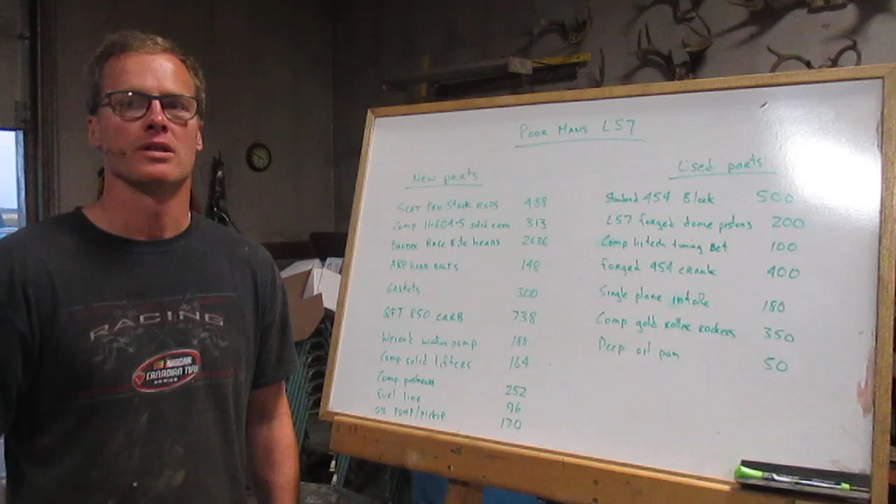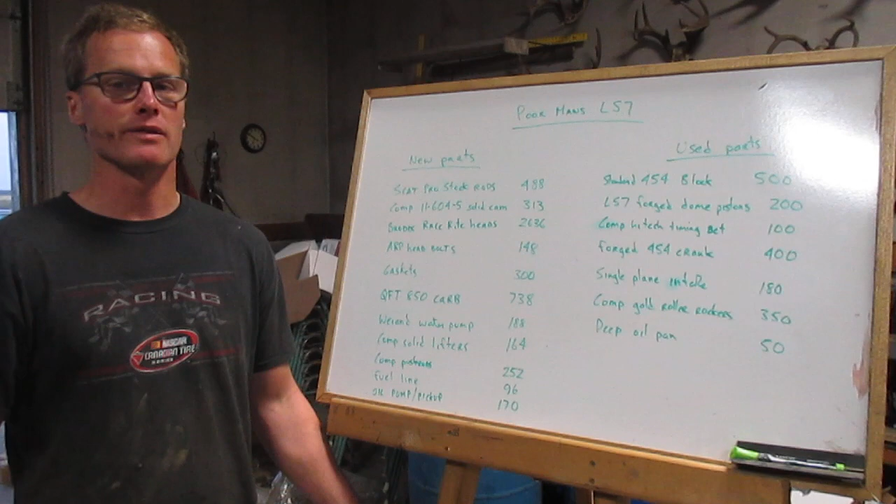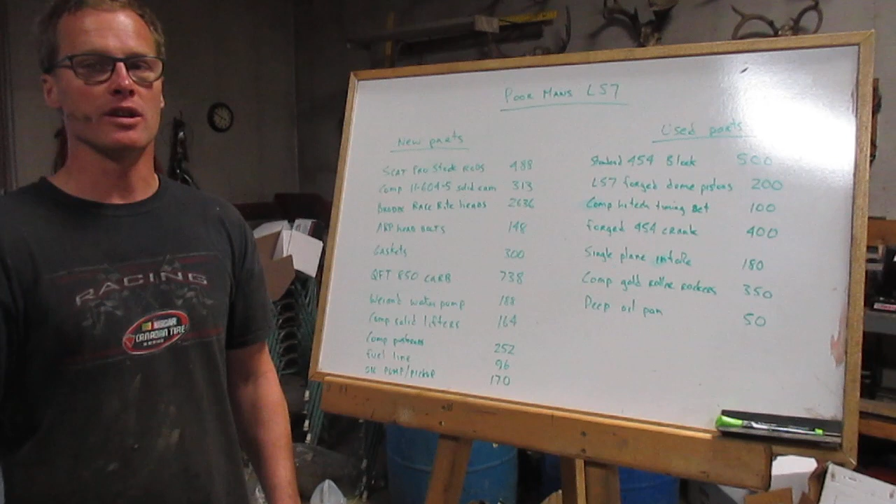Hey, my name is Brian Taylor, and I'm here with a big block Chevy that I've recently put together. This is the fourth in a series of big blocks I've built using a mixture of new and used parts. This one I'm calling the poor man's LS7. I came across a set of LS7 pistons on Kijiji that I couldn't pass up, and I decided to build a motor around them.

Here's a list of what I've got into this motor.

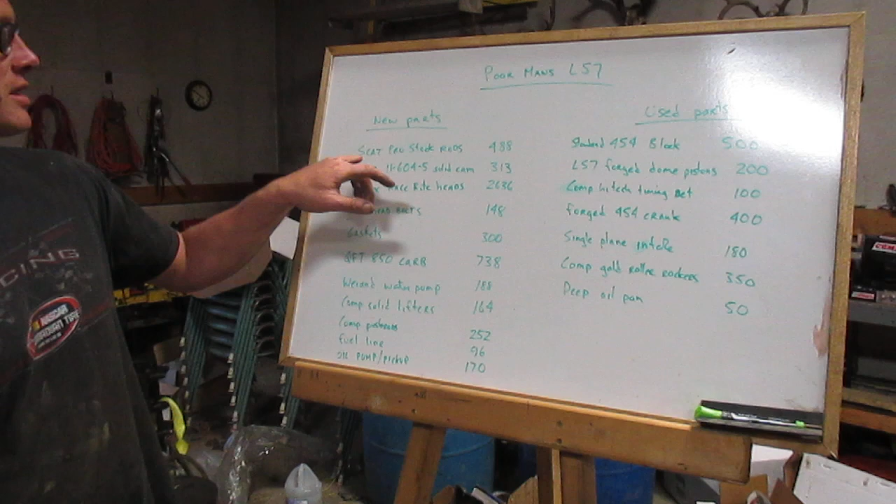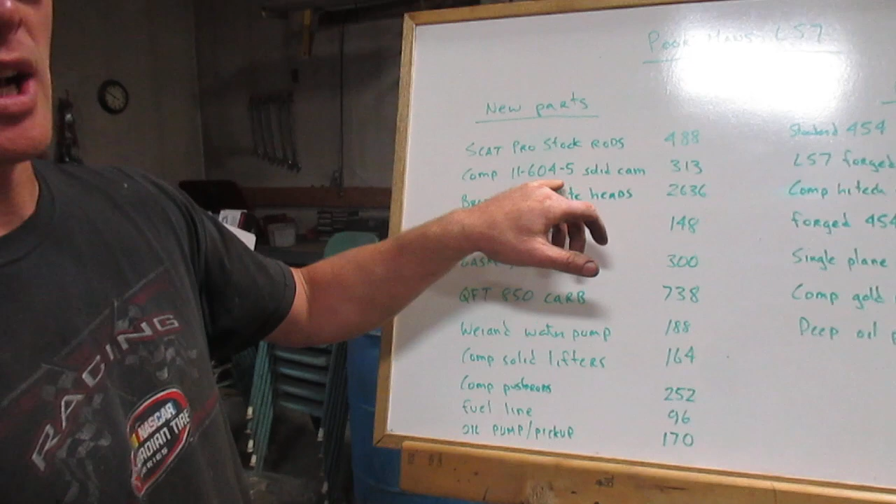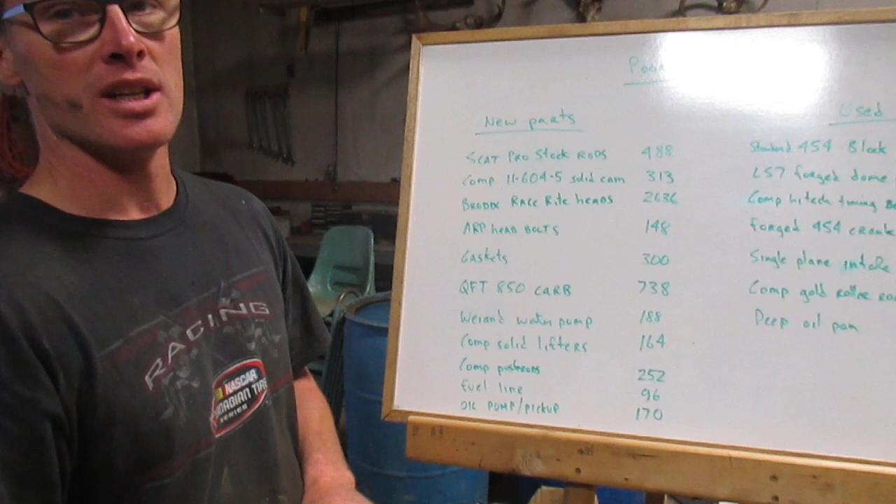For new parts, I put in a new set of Scat Pro Stock rods, fully bushed, a Comp solid lifter cam, 11-604-5, a pretty healthy cam, and a brand new set of Brodix Race Rite rectangle port heads. I originally planned to use iron heads on this build, but once I did the math, this seemed like the way to go.

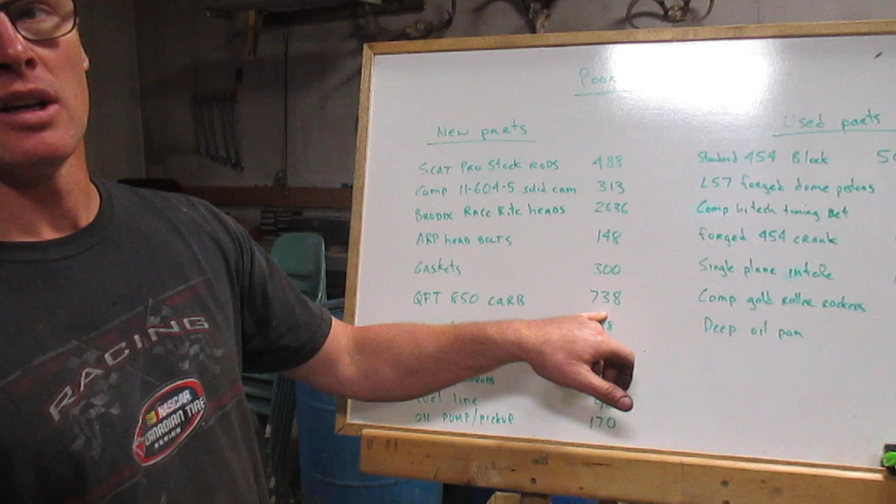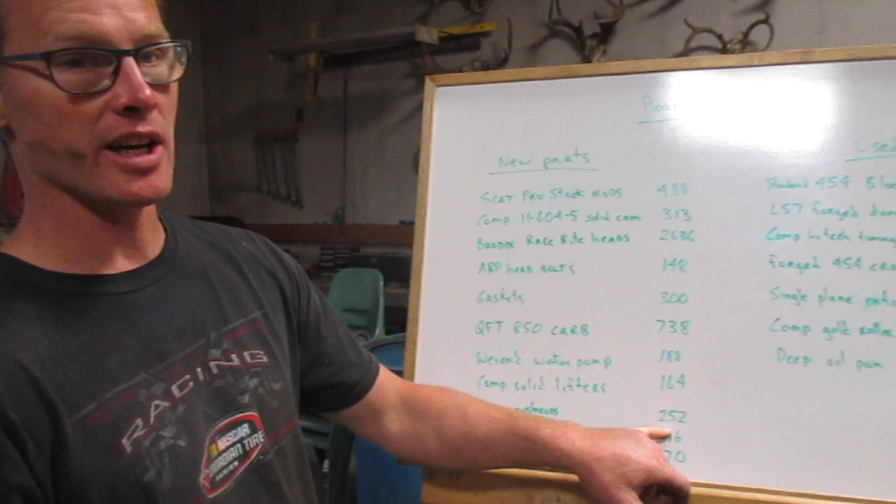Head bolts, gaskets, and a brand new QFT Quick Fuel 850 carb. I hate using junky old carbs on my stuff, so I put a brand new carb on it. Weiand water pump, solid lifters, Comp push rods - I used the high-tech ones that had to be measured to the right length for this build. Braided fuel line, new oil pump and pickup.

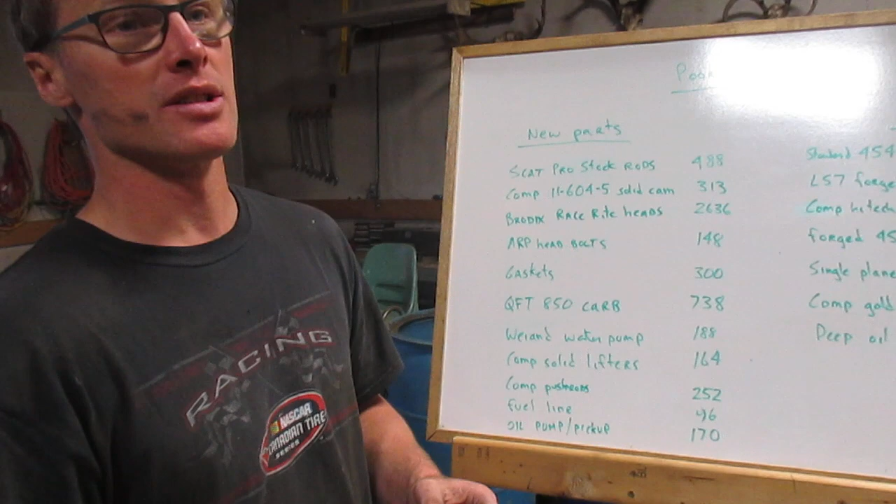There's lots more new parts like oil, spark plugs, carb studs, lots of little odds and ends, alternator bracket. But that's the highlights of it all.

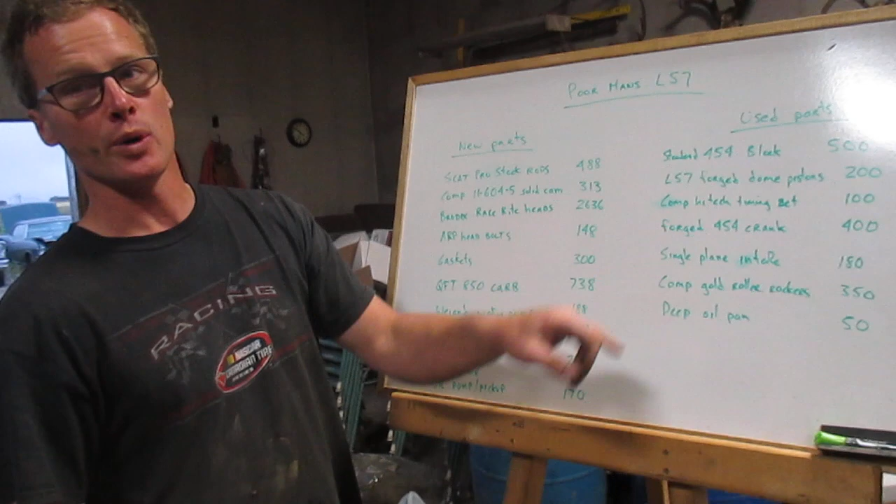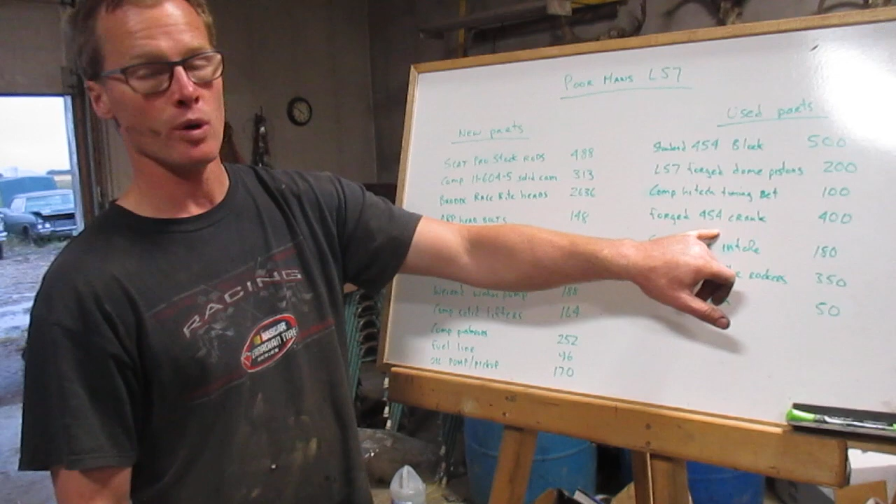For used parts, I found a standard 454 block out of a motorhome that was in just beautiful condition that would work with those standard pistons. There's the pistons - picked them up for 200 bucks. Comp high-tech timing set, that's the one with multiple keyways and the Torrington bearing on the back. Forged 454 crank - I've torn apart a lot of 454s, and this is the first forged 454 crank I've ever come across. So they exist.

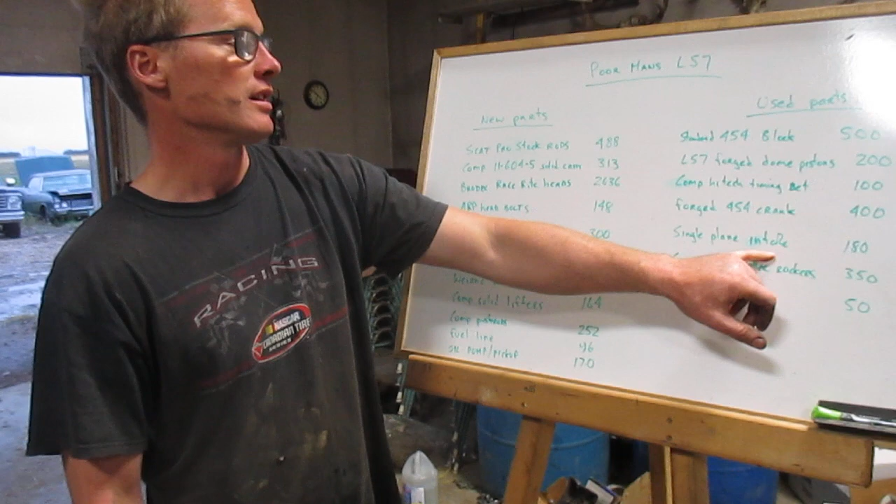Single plane intake, some kind of Chinese one - it looks good, works good. Comp gold roller rockers, those are the 1.7 ratio. Deep oil pan - I used the biggest oil pan I could find on this thing.

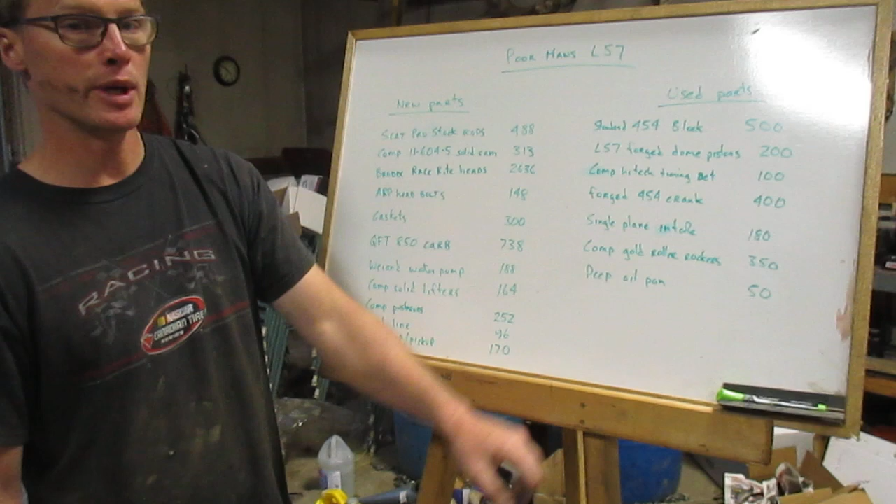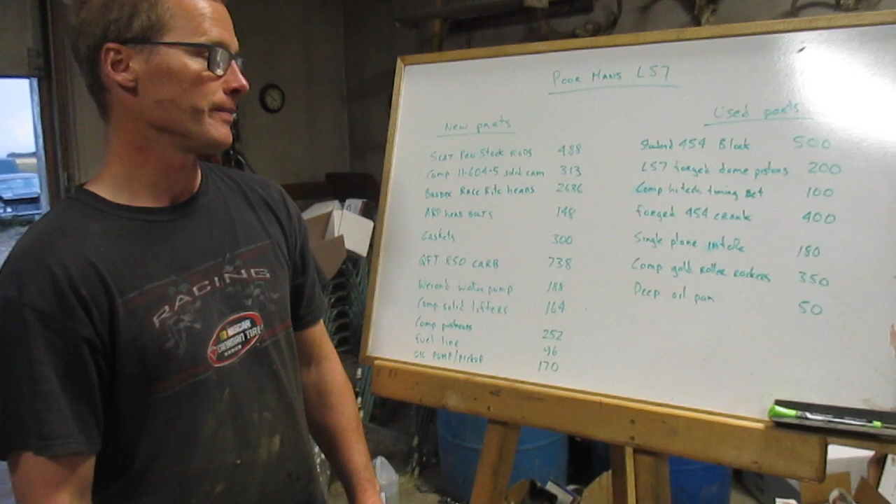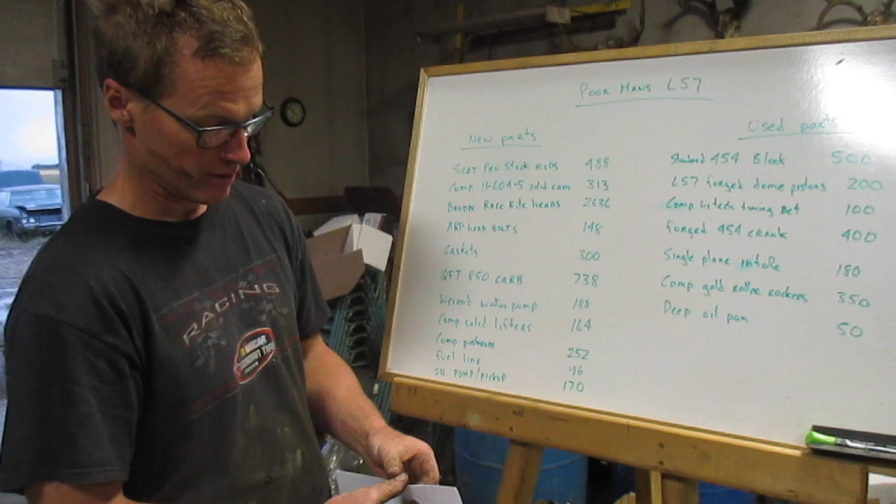This motor would work awesome in your race car or maybe a mud truck. It's got about 12.5 to 1 compression, probably making somewhere between 500 and 600 horsepower. So I've got it all listed, every dime and nickel that's into this build. Now let's go hear it run.

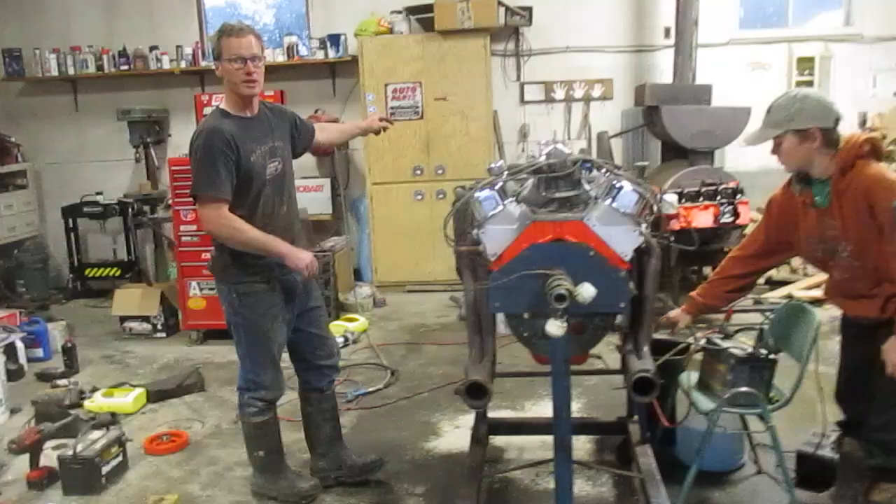Comes down over here. Okay, got my whole team here.

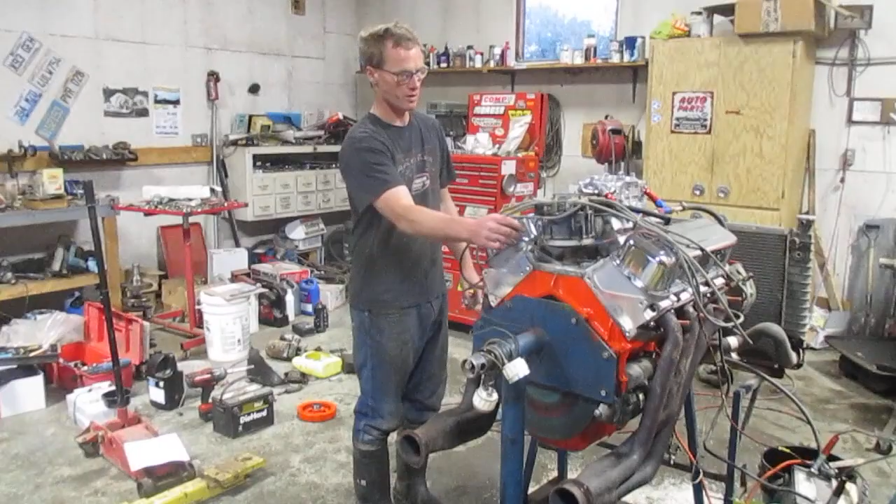I've just run this motor for maybe 20 minutes today with all those brand new parts in it, breaking in the cam. There's a few just nothing special parts on this motor that I've thrown in for free.

For instance, this is just a stock HEI distributor that's locked out - I didn't charge nothing for it. Old plug wires, I just threw some on because I don't know what'll be on there for headers when it ends up in whatever vehicle it ends up in. These are just my junky headers that I use for running motors with.

I put an alternator on it and a starter, and I put one of my nice laser cut alternator brackets.

So I'm asking $8,300 for this unit. That's the best I could do based on all the new and used parts that I put together. I had hoped to build this cheaper, but once I started realizing what it takes to do a motor of this size and this compression, I didn't want to cheap out on stuff. So here it is, poor man's LS7.